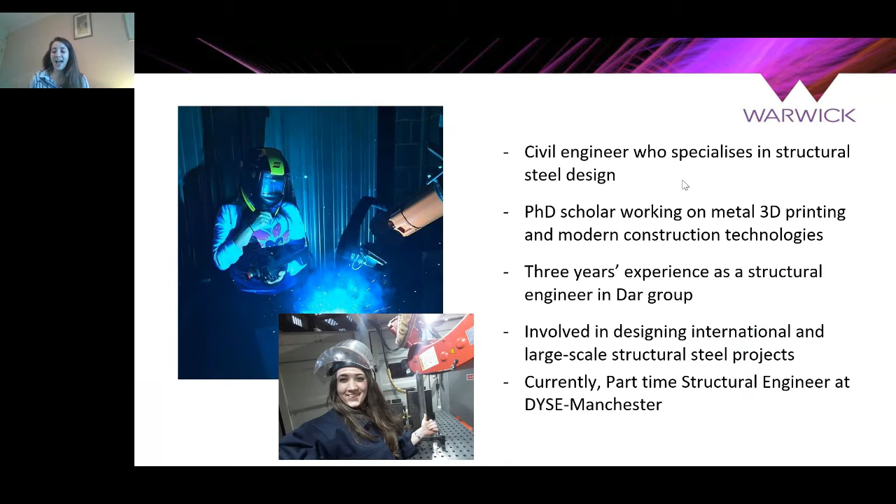This is me while doing the printing with different collaborators. In 2019, we got a commendation award from the Institution of Structural Engineers on a research paper we submitted, and we're trying to push AM in construction further. I've also been lucky to introduce my research outcomes at different conferences in Norway, Australia, China, and the States, and different places. So I'm really excited to be here to share awareness and maybe inspire a younger generation to take this technology forward and push it more. The more we talk about it, the more we believe in it, I believe.

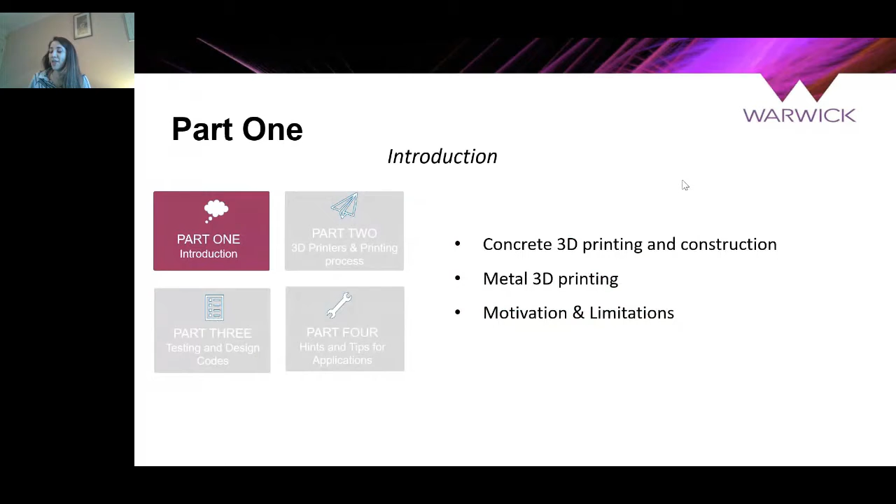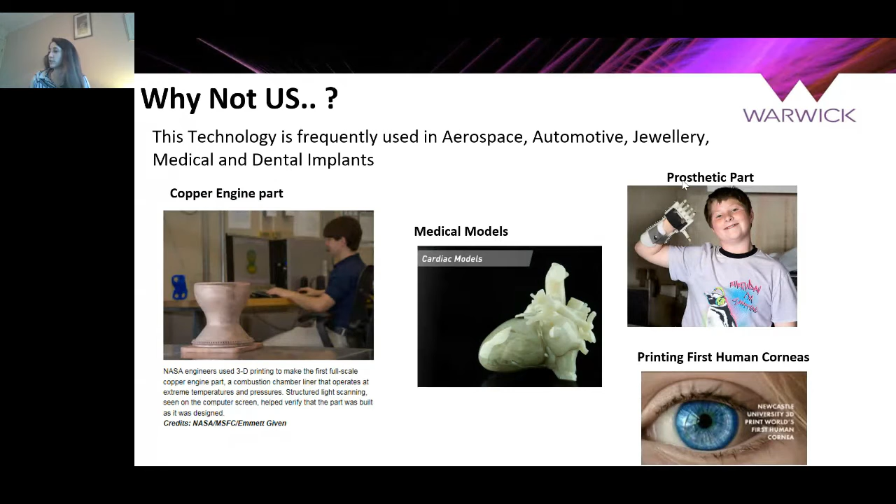So what's happening in the construction industry? This is what we're going to start with. What was the motivation and why do we need to talk about it? We've seen a lot of updates across all professions and how they've started using 3D printing. We've seen it in medicine, in automotive, in gas and oil. You can see how it's started helping us all.

So the question for us as structural engineers or in construction was, why not us? When I started in 2018, I started seeing the growth of concrete printing in construction. We've seen how from its early stages until 2008 it was in a steady stage, but later on, from 2008 till now, it's been an exponential growth.

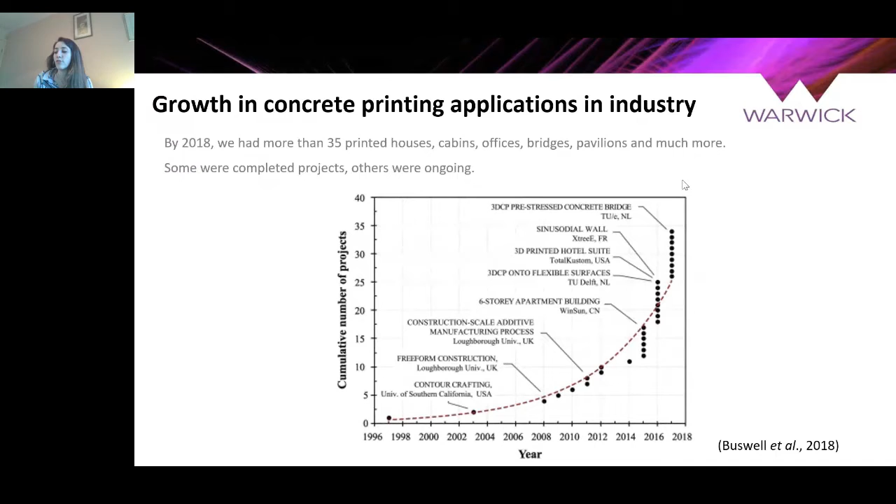There are also key marquee projects already in the industry, and we've heard about companies that start printing houses in 24 hours. We've seen people now living in 3D printed houses. We're starting to see it go global, in every country. And it all started here - these are key milestone projects that we always see when we're talking about concrete construction.

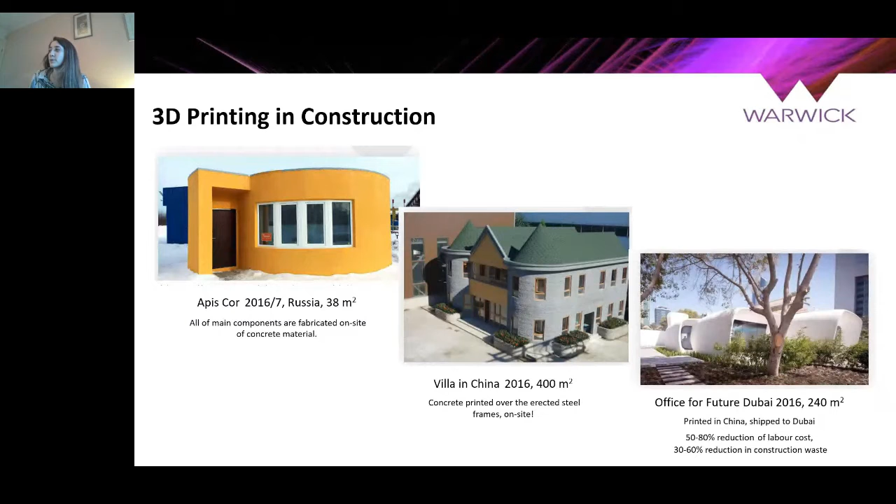The Apis Cor houses in China, and how Dubai is trying to push the additive manufacturing industry in construction to have a minimum of 20% - so all buildings have to be 20 to 30% 3D printed by 2030. So we've seen how it's being pushed, taking that forward from a 38 square meter concrete house to a 640 square meter house in Dubai, and you can see that here.

The yellow one was being printed in cold weather, whereas the opposite was printed in hot weather. We've also seen in Italy houses that have been printed from soil.

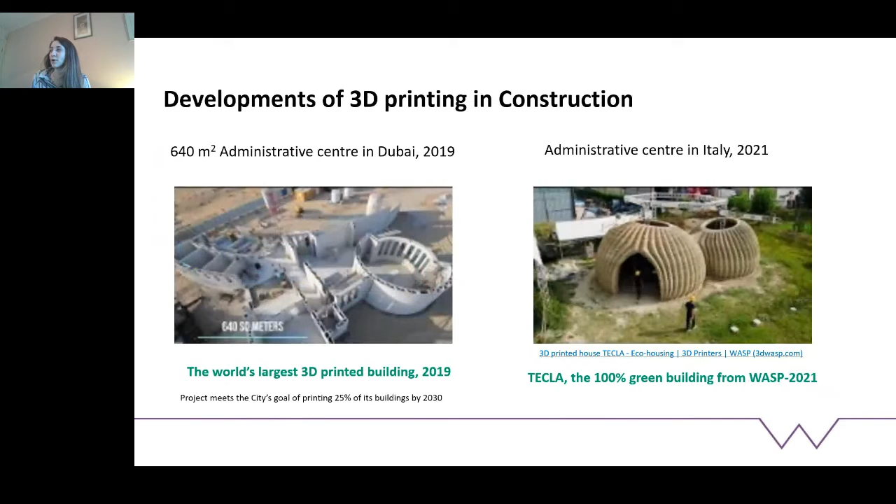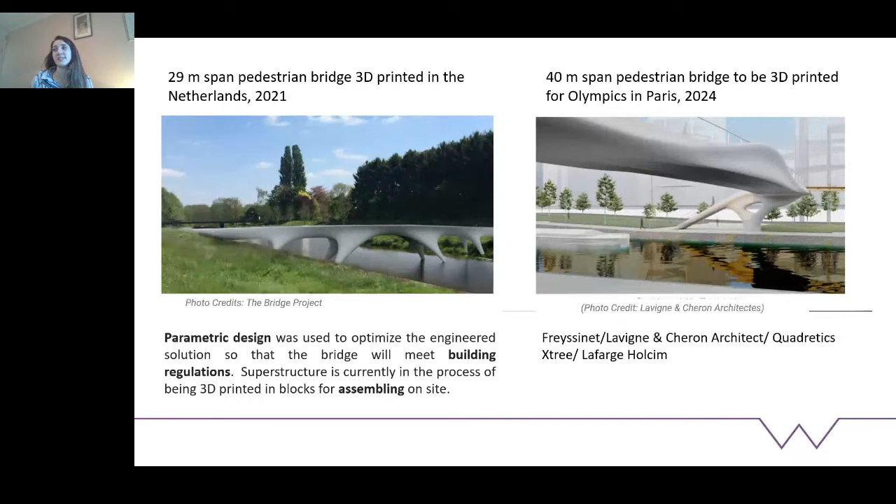So we can see how all this development is coming forward, not just in houses, but also in bridges. These are two design bridges: one in 2024 Paris is working toward printing a 40-meter span pedestrian bridge for the Olympics, and we've already seen the bridge in Amsterdam with a 30-meter span on site.

This is all about concrete, but how about metal printing? Where are we with metal 3D printing?

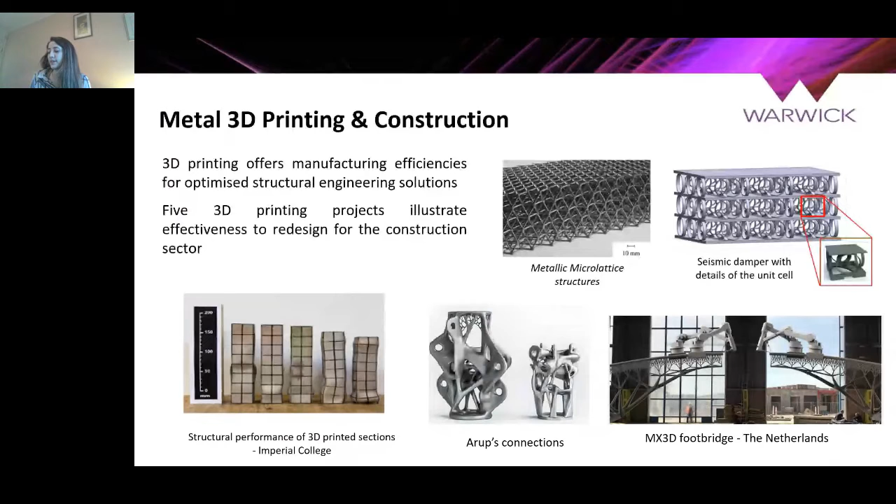And in 2021 the MX3D bridge finally went on site, after a long journey of printing, designing, approval, and metal testing. Because of our classic step construction and our focus on safety, we need to make sure everything is safe - I'm talking about confidence in materials and safety. That might tell us why it's still slow in construction.

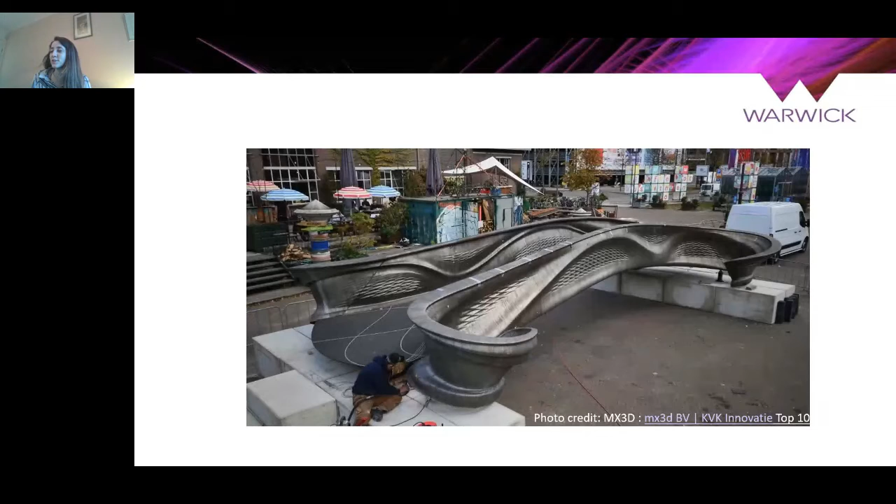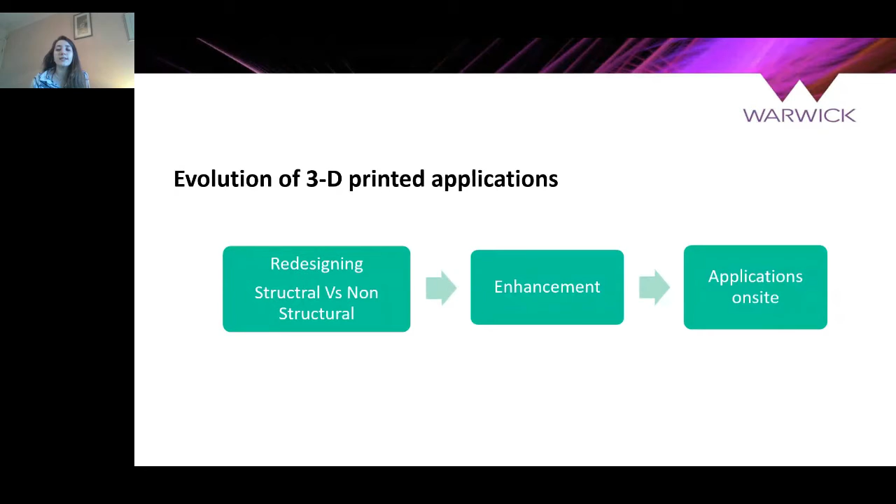The enhancement could come from different applications that I will talk about, and we've already seen it with the dampers. The question is how we can take it further to application on site.

What was the motivation? When I started, I was looking at that iconic design in London, St Pancras - earlier when that was built, material was expensive and labor was expensive, meaning when we design, we have to optimize as much as we can, while also creating a fantastic shape that pleases the client and architect. The question is how and when we could come back to this. That was the motivation.

Will 3D printing be the way forward to have more optimized design? So this is the vision - and I think this is the vision for all AM industry users in different fields: to have optimized structural engineering designs using this novel manufacturing technique.

But everything takes steps, and we're still in early stages - we still have limitations. The more we highlight it, the more we know the direction. These are limitations, but we're still improving, and it's still coming. We have limitations in design software, techniques, materials, and knowledge.

It's really important for the market to know what applications or when we can use it, because you want to get feedback from it. So when you start, you would see those limitations. If you have your printers in-house and start printing, these are the early stage results - you can see the porosity, the melting not being proper, different types of failure you can recognize. Everyone will see this - it's a learning process for us.

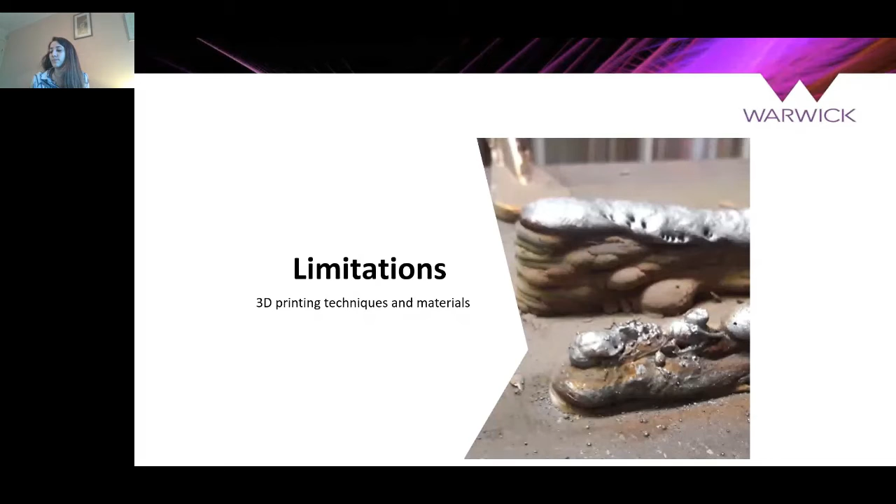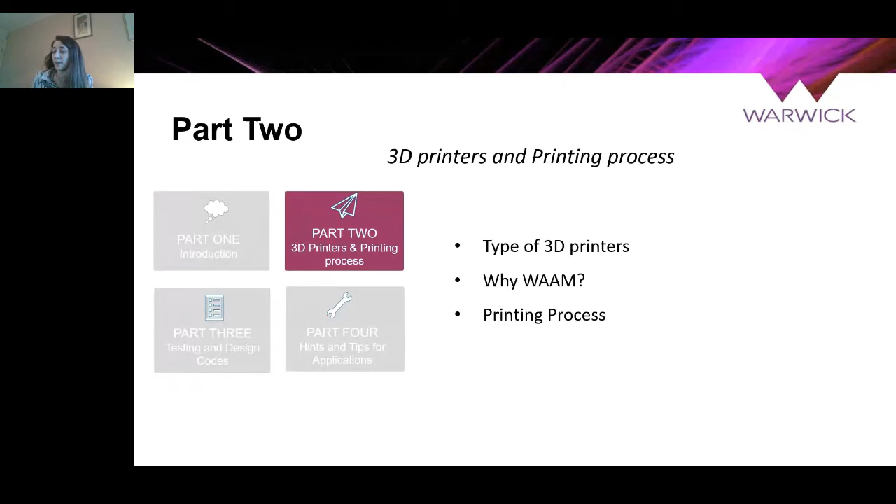I'll go quickly through the printing process, what we printed in my project, and the tips to take it forward. We categorize AM into 7 processes. The one highlighted in gray is used in concrete, the one highlighted in cyan is powder bed, and DED is used in metal.

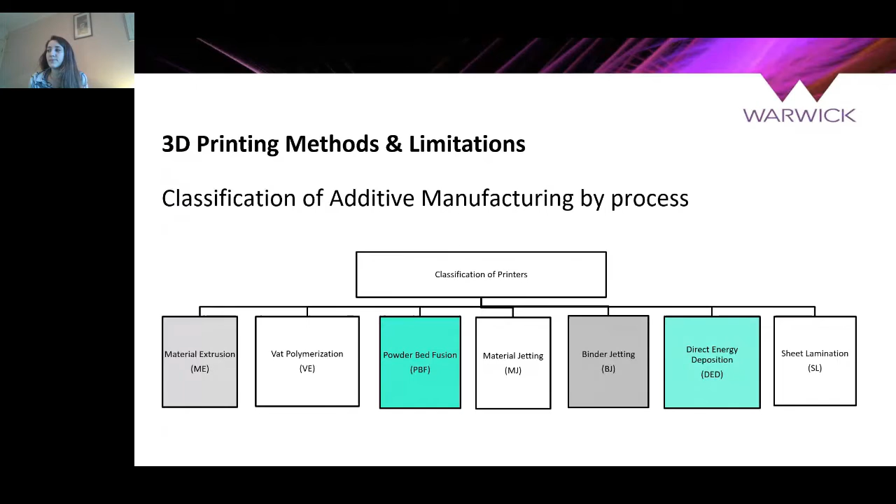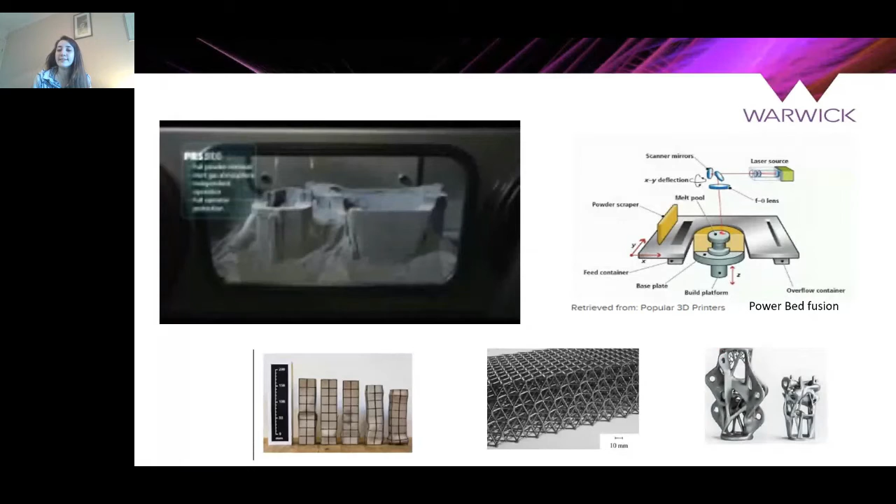When anyone starts, you ask yourself: is it powder bed or is it DED? For construction, in my design and research, I've used DED, not powder bed, because I believed it has high deposition, I'm not limited with the chamber room, I could have more high material utilization, and the time needed was different. Mostly what governed me is the size, because we're talking about construction.

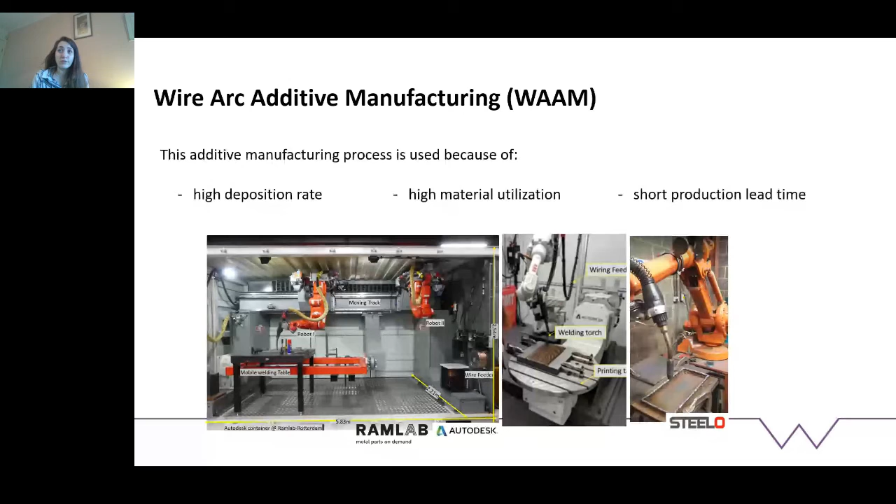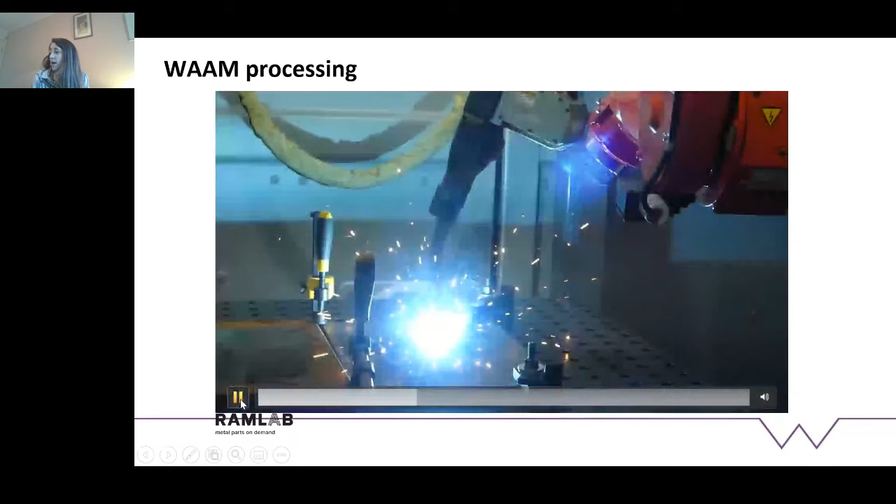In my research, I've been very lucky to collaborate with Steelo in London, Autodesk in Birmingham, and RamLab in Rotterdam, and we used the Autodesk movable cabin there. So we've used the WAAM technology and done different testing. For those who don't know what WAAM technology is, this is a quick show of how the printing process happens - the robots, it's like a welding process, and we can see how that bead has been printed. I shouldn't have taken the pictures, but I took safety precautions when I did that.

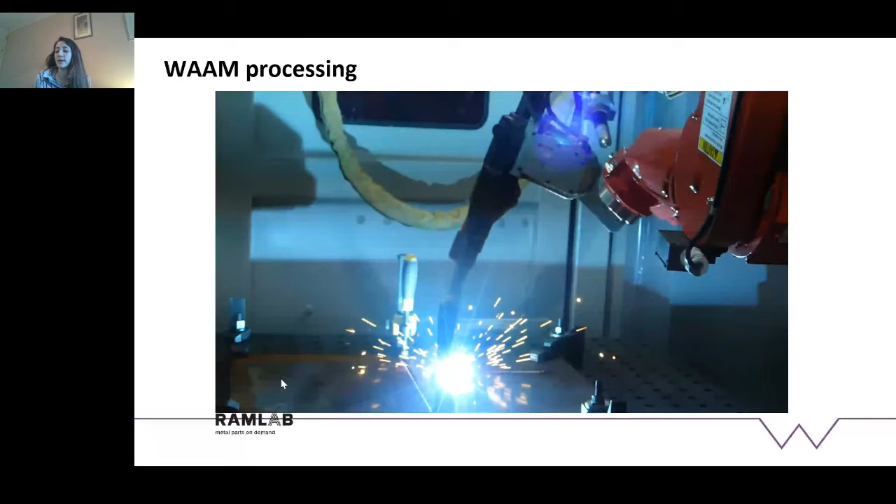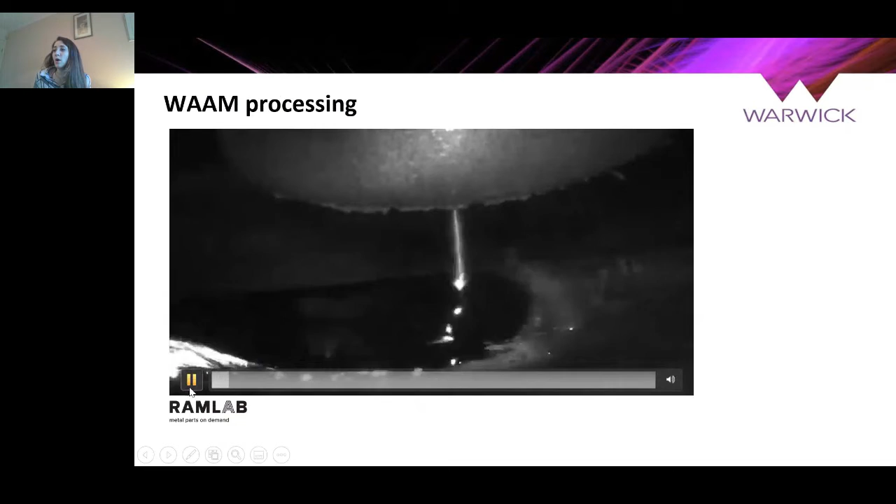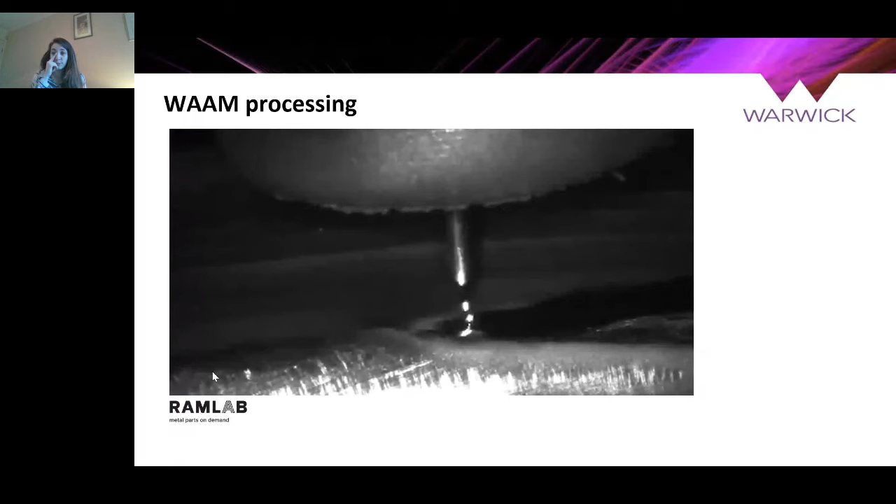So it's like a welding process that builds layer on layer, filling a 2D shape. If we go deeper to see how this weld or bead is built, we can see - yes, it's like a wire going down, melting and filling things - but how is the interaction? I'm asking questions that have been asked while doing the research, because we want to make sure it's giving us a good, strong material.

These are the three main steps that all 3D printer users need to follow, or are already following. First, we need to optimize the parameters. For those new to this, we need to see how to optimize the speed. Coming from a civil engineering background, I needed to learn about welding - what height, what speed, what voltage. If you see in that white picture, you can see different beads, all with different widths, different heights, and different porosity if we're not doing the right optimization. So we need to do this exercise before we start, unless we have software now that we could depend on, but we still need to do that exercise to optimize our bead.

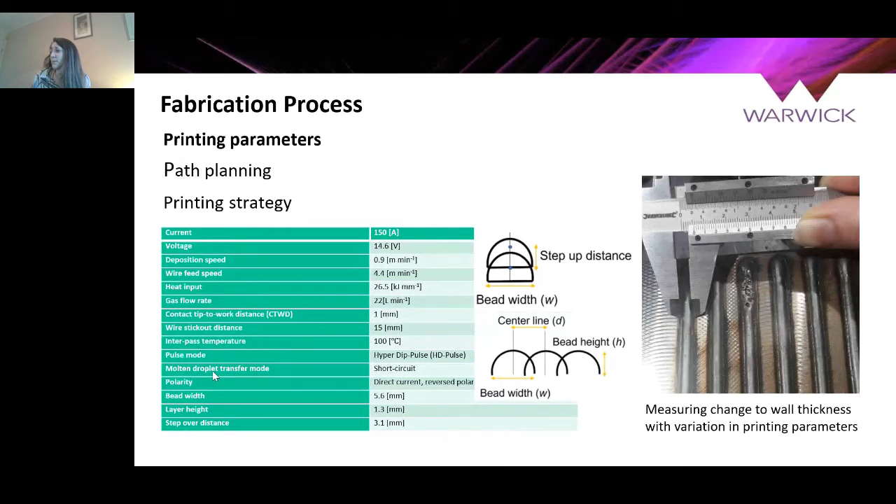Then we need to do another exercise to optimize the spacing between each layer bead, which is called step-up or step-over distance, because this will affect the overall results. In structures, this is something we need to keep in mind - our thickness, when designing, ranges between 10 and 20 millimeters, so you won't have a bead width that wide when doing the WAAM technology. So we need to think about the path planning process.

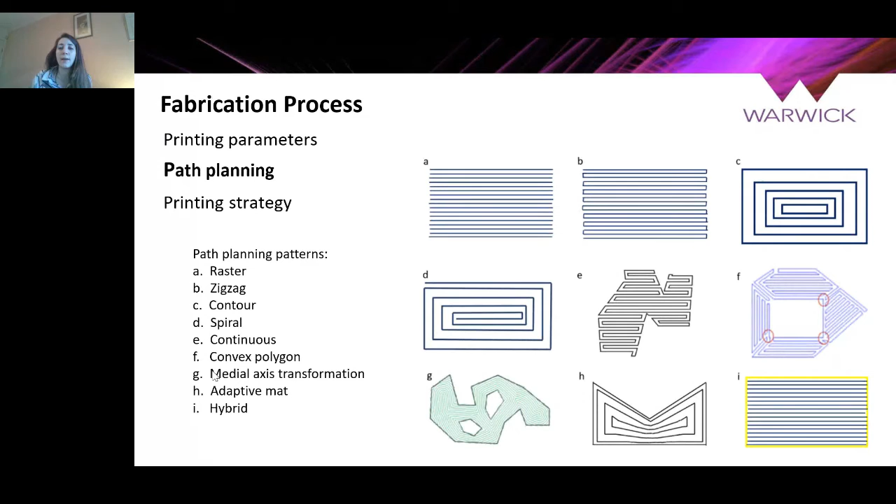Which one to use? Bridging between both technologies, if you're familiar with these - raster, zigzag, contour, and so on - types of path planning, I would go for the raster or the contour, mostly the raster, because it has that welding basis which already has a benchmark design code in the structural industry. So the raster was followed in the application that we already did in my PhD work.

Coming from that old school, I thought the I-section is a starting point, because all our design codes talk about the I-section as normal in design, in addition to circular and hollow sections. But for the I-section, talking about the 10 and 20 millimeter depth, one bead is not enough, so we need to think about the path to fill this 2D shape.

I'm highlighting this because I want to share that knowledge to push it forward - which is the path, and which was the more optimized one in the research. We printed different shapes and studied the material to see what the difference was and how to do it.

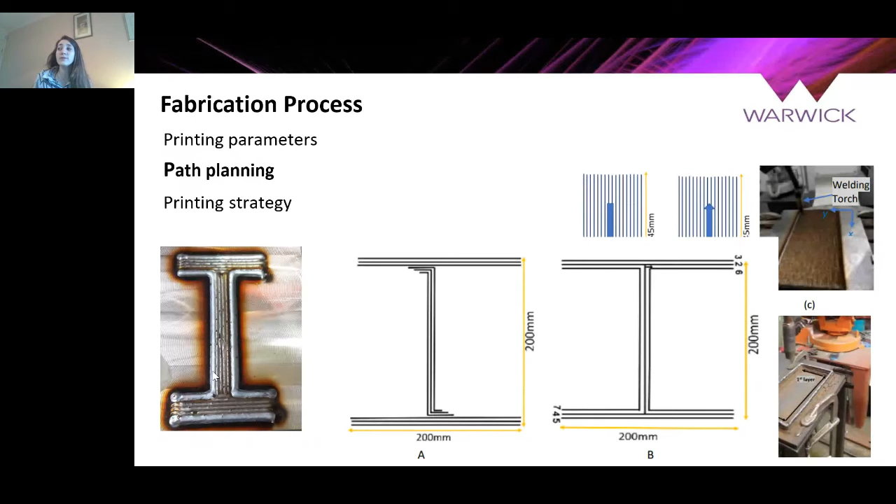So path planning is the next step, and then printing strategy is another step. From a structural point of view and construction, we need to see where the failure will happen. So we need to ask the client what's the purpose of that joint, or what's the purpose of that component, so we could know where the failure is.

In my research, in collaboration with RamLab and TU Delft, I've asked them to print that beam to column connection. Because it's a beam to column connection, we thought about where the failure will happen - it's going to happen in the joint, between that column and the beam. These are the key points highlighted in yellow - this is the transition zone.

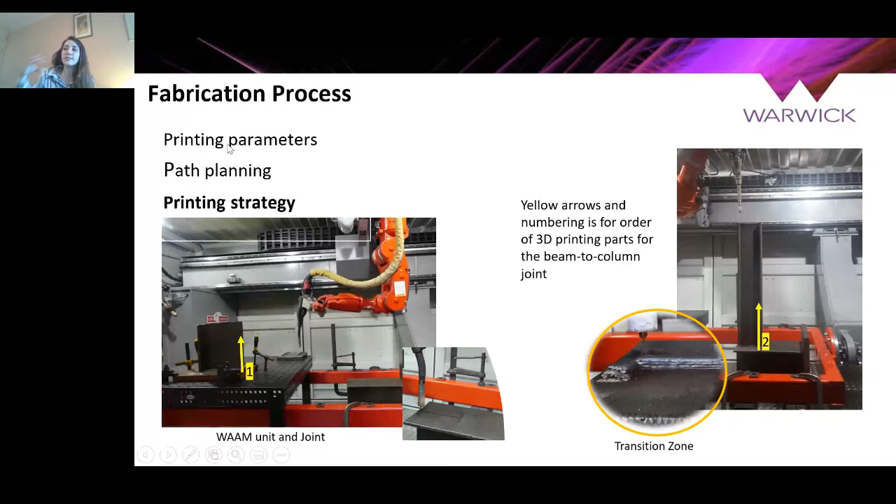When we did the printing, we thought about a special process to make sure of our strength. The printing strategy was two-directional because of the shape, so we started printing the columns and then the beam. These are different steps - the more we know about it, the further ahead we take it in the concept starting point.

So summing up, after all this learning process - from seeing that porosity in the beads and in the walls to the learning process in the project - these are the printing components that have been done. And these could show a potential application. How am I saying that, and why?

I would start with the Autodesk plate, which we printed in Birmingham. It was a starting point, a plate - this is how you would see it. But how I will see it is for an old factory, which has rusted, and after time has a weakness in the plates and flanges. The robot can go to that factory and print extra layers to thicken the design to make sure it is safe.

So this could be one of the applications - the enhancement stage. Yes, we still need to research durability, and how the connection between the old and the new steel would happen, but enhancement is one of the ways.

The other application was at Steelo, where we're thinking - when we think about fabrication, we want to minimize the number of labors, so we need to automate the welding process. We could think about one technology being used for printing the fin plates on site, or in the factory, instead of chopping and cutting things.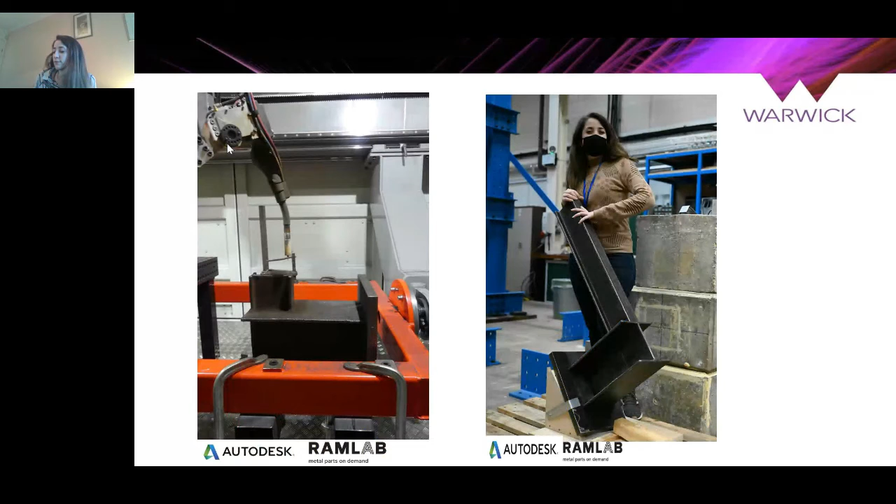So coming back to the civil world - yes, we did the printing, we learned about it. We want to see what's going on inside and how to convince a future user that it is safe, and that we could take it forward. So we did an XCT scan and we did a destructive test.

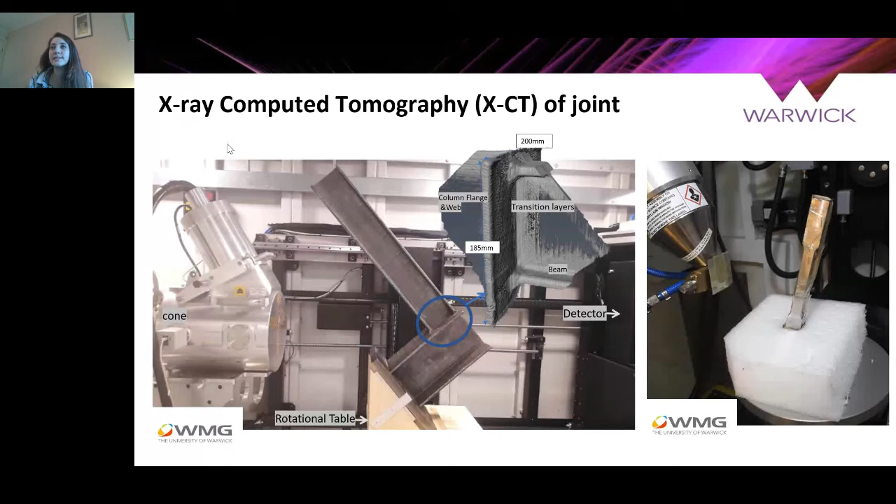When we started with the XCT scan, we did it in collaboration with the Warwick Manufacturing Group - we studied this. We scanned most of the element to see the relation between the printing process, tensile testing, characterization, and the inside of the component. You would be surprised - it was mostly my printing, so I would expect to see a lot of porosity in all this, and it was so. We know why we have porosity, we know the location of the porosity, and we know the links now between the porosity and the tensile test readings that we need when we design the characterization.

We've seen how the printing - we can see the interfacial relation, so if you can see between each layer these fancy colors on the left, we can see why we are having it. It was because I hadn't optimized the printing step-over between each layer. It wasn't right, and we can see the density is different.

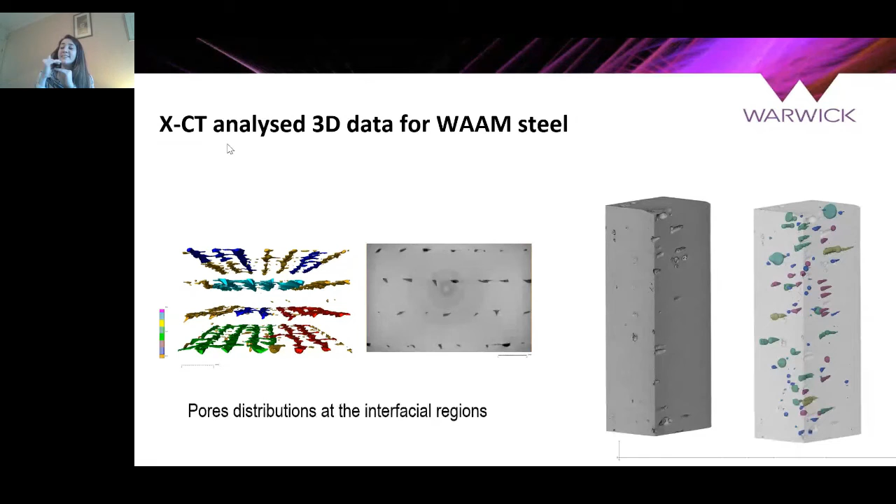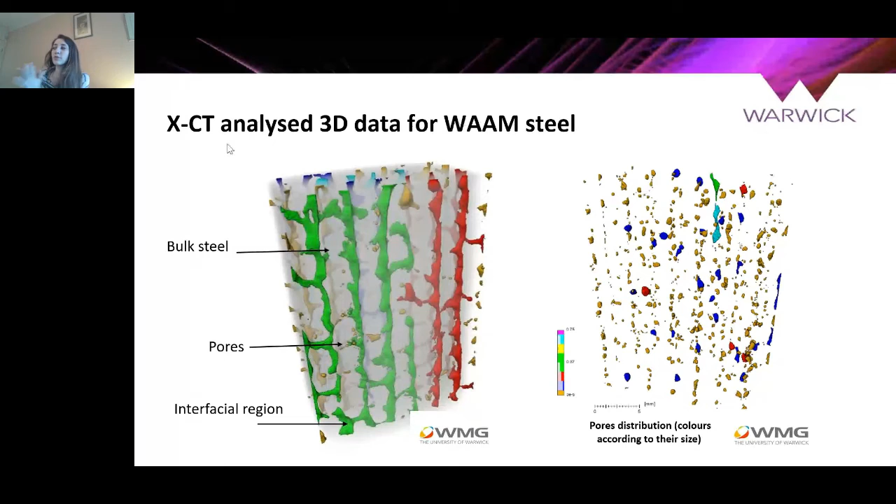That's why we have it in between, and we can see how the porosity is in between these layers. So it was a learning process, and the funny part is after exploring this, we know the parameters.

For the beam to column joint, when we did the XCT scan, and because I've shown you how we did that transition between the beam and the column, you can see in the right picture the white color, the white printing, or the white captured in the photo, because it was dense printing. We can see this with the XCT scan, and we can also see it later with our results. This is due to the tapered printing layers before going ahead, and we can see it.

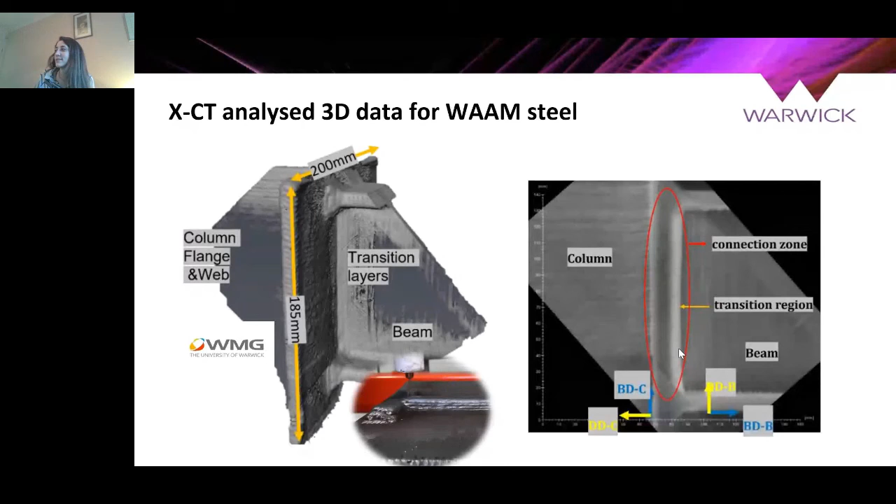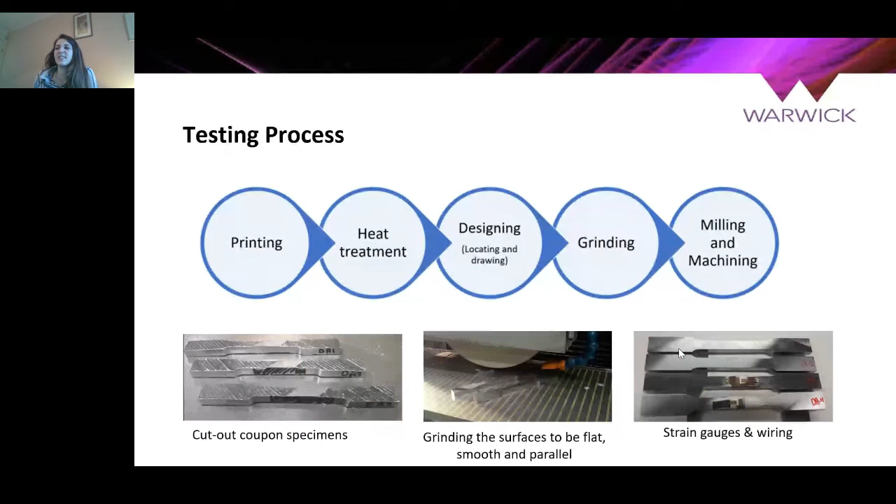So we studied the XCT, and then we had to do the tensile or the destructive test to see the strength, what's the F yield, what's the F ultimate, because this is the starting point for the designing process. We did tensile, we did impact, and we got really brilliant results.

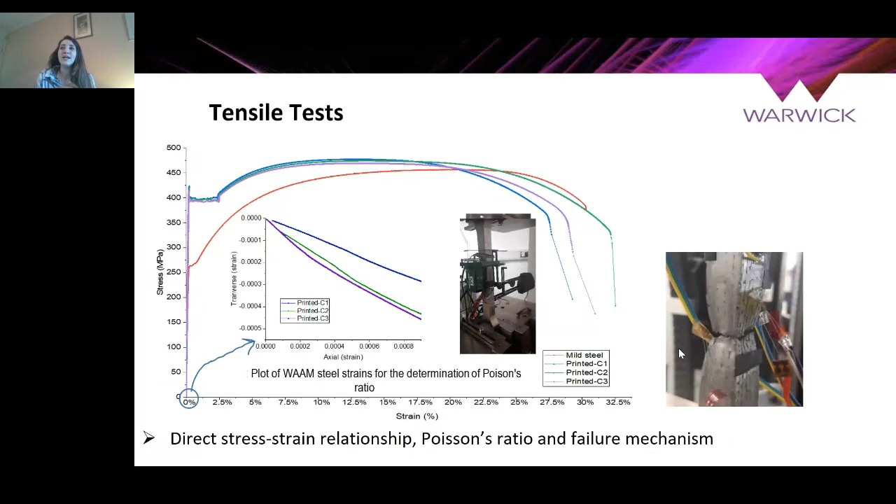For the mild steel, we could see how we achieved the current Euro design code limitation with the porosity, but with a minimum acceptable porosity, which was less than 1%. So I'm highlighting this here, and for the high strength, we achieved the 10% elongation, we achieved the F ultimate to F yield percentage, and we've seen the cup and cone failure.

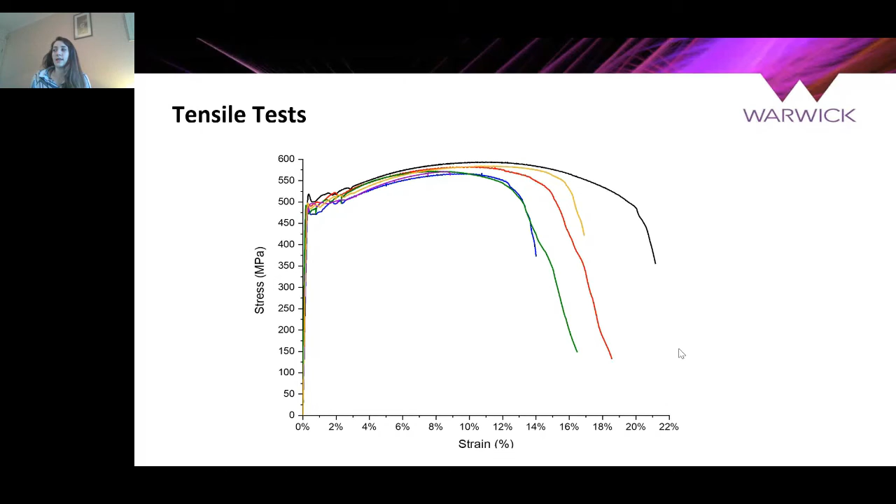So why am I highlighting this? Because it's an early stage for AM in metal, in construction, and we already know that limitation and the porosity.

When casting started, we accepted a minimum percentage. So in my research, I'm trying to push that forward and accept a minimum limitation at early stages, because building confidence is vital for structure, because it is our safety. We're living in the houses or we're stepping on the pedestrian.

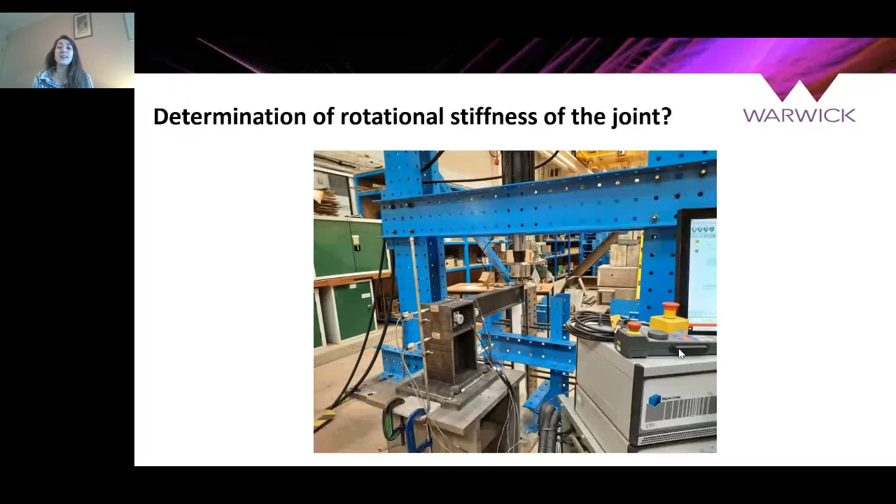So after seeing that, we're applying and getting that, we've done beam to column connection tests. We've studied the stiffness and the rotation, yes, for a conventional beam, because later on you would see a flowery beam, a star beam, whatever design beam, but we need to start somewhere with something to benchmark it. That was the starting point, and it gave us results that align with the design code and where it could fit.

So that was very optimistic, to take that and share that knowledge and take it forward for future application. We've already seen the technology in the gas and oil industry. So why not in construction? Why not doing that in our fabrication workshop?

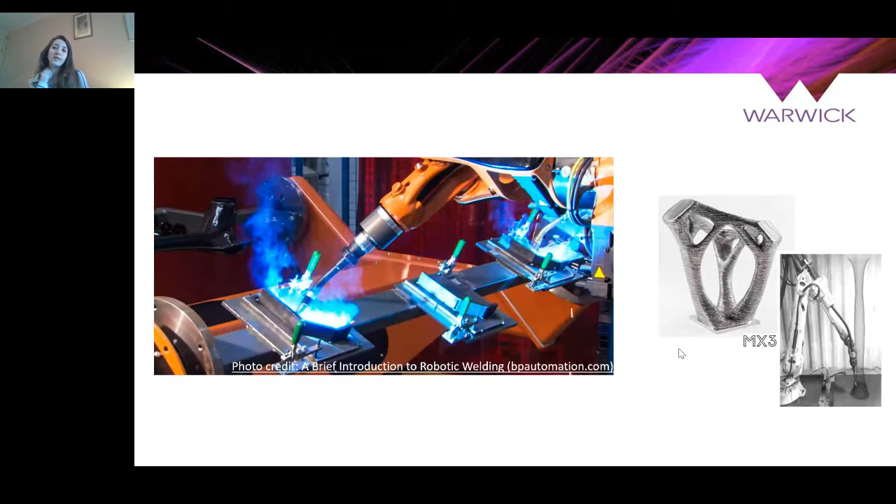Yes, we've seen MX3D printing that fancy joint and those columns. The more we did that research, the more we could take it forward.

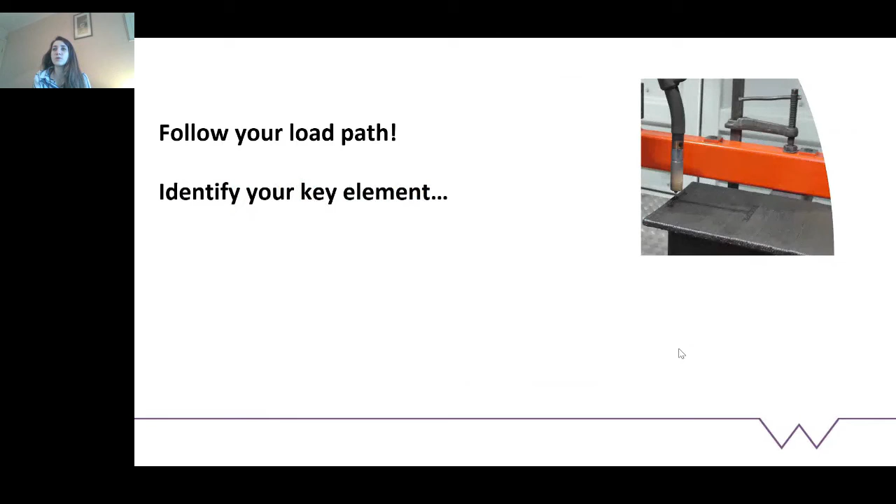But my advice is to always ask, where's the load path? Ask that structural engineer. Ask them what are the key elements, where the failure will happen, so we think about it. And also, the more we know about it, once we know these key points where the failure will happen, we will think about it, because we want to push the industry further. Don't take it as just a fancy shape, ask them.

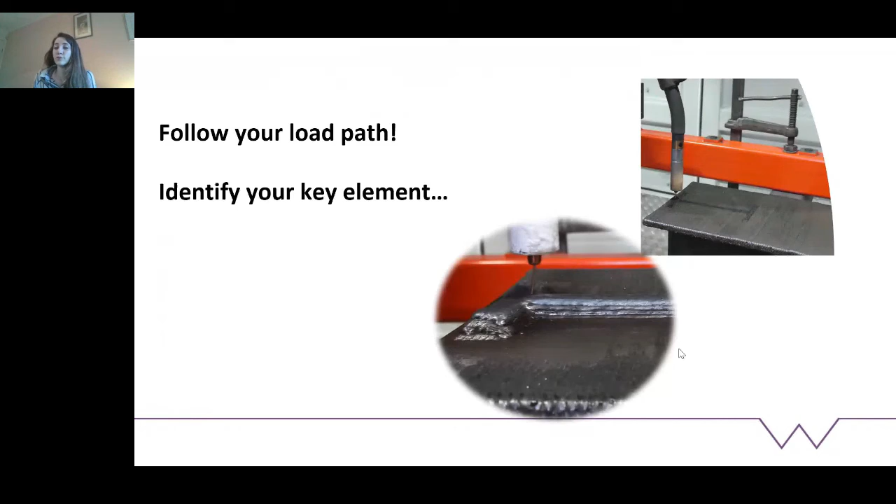As a starting point, we could design things that are not a key element in the building, but could be planned so that another element could replace it if anything happened, because we still don't know the future of it. So it's a mix of words, a mix of positivity and challenges, I would say that way.

So if we think about the challenges, like any new innovative technology, we still don't know the long term effects. We still have imperfections. We don't have enough standards. We still see the porosity.

But looking at the positive side, yes, this could be the way forward to engineer our design to have a sustainable design. We always hear about carbon, and we want to minimize the carbon effect for our environment and for sustainability. So this could be a way forward for us to optimize our design, to have more parametric design. We've seen it, and we could apply it now with the AM technology.

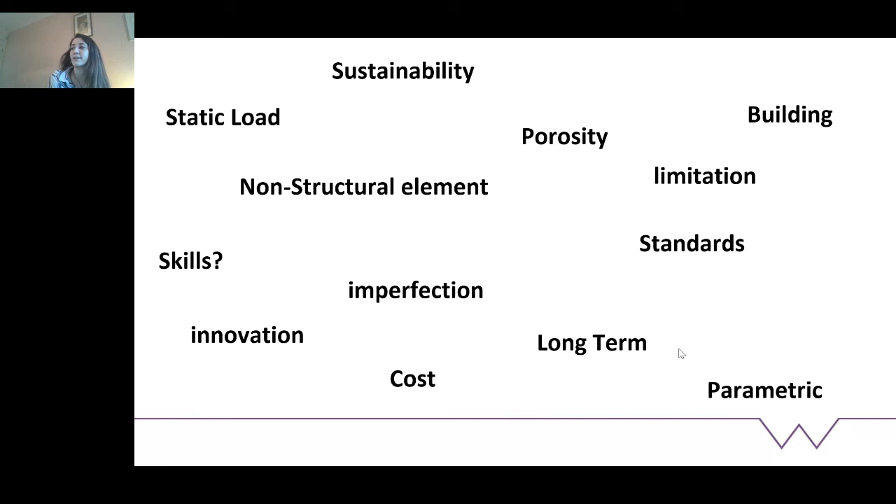If you ask me about porosity, I would tell you, start using it. You've seen the static load data here. You could start using it in buildings. Avoid bridges for now, because you don't want questions about fatigue and future cracks, but you could find a way by telling them, yes, in the building I don't need to specify this for now. So it's innovative, but we can take it forward.

I'll ask this question to us, the younger generation, and also the generation leading now, and take that, all the CEOs and directors who could make a step to take it forward. Believe in the technology, give it a chance, and let's come back to this more optimized design. And yes, let's talk about it and raise awareness about it.

Thank you all for listening. And if you have any questions, I'm all with you. Thank you.

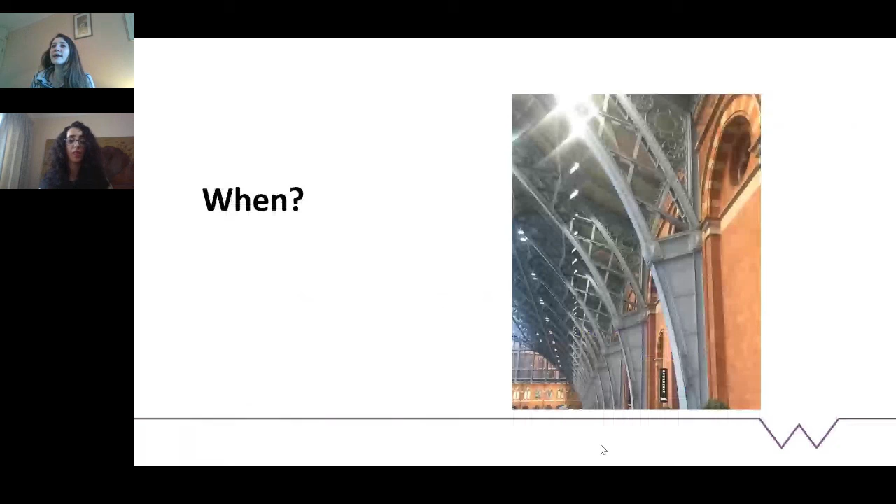So I would say softwares, because we want more useful softwares for structural engineers, because when we're designing, we use a lot of hand calculation, but we depend also on softwares. So we don't know how much we could really relate the current results from the AM or the materials with the already designed software we are using. So that was the main purpose of this research, is to benchmark it with the current design code to see how much we can use the current design code.

But coming back to how we want to push it forward, I believe, having worked in this for the last 4 years, the more we share where we are in AM, share what's new. We don't want just to hear that we printed this or this is what we printed. No, share how we printed it. I know at the end you need to prototype it, and I know you also want it to be a business for you or the company, but also when you give that knowledge to the engineers, that this is how it's been done, this is the results, I think they will believe in it more. And then they will take it forward.